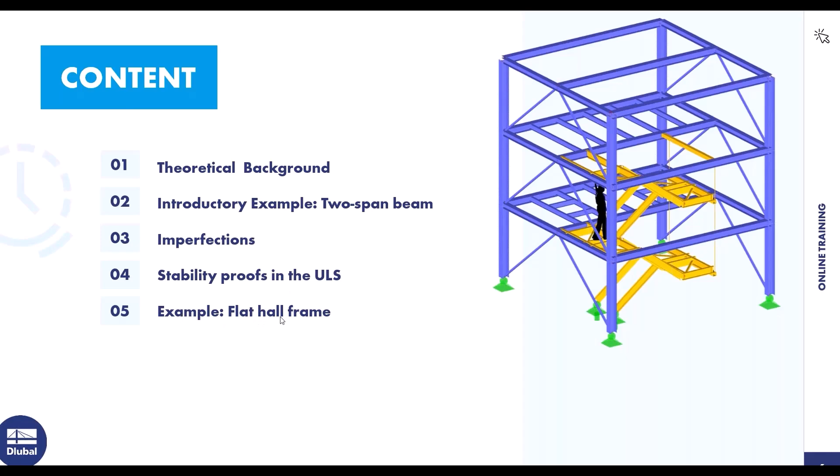At first, I'll say something about the products for design according to EC3. The most important add-on is the Steel Design add-on, and with that add-on you can design steel members according to international standards like Eurocode, AISC, and so on.

We calculate or design according to Eurocode today. Then there's the add-on Torsional Warping, with which you can consider the 7th degree of freedom and torsional warping. Then Steel Joints, with which you can analyze steel joints based on the finite element method.

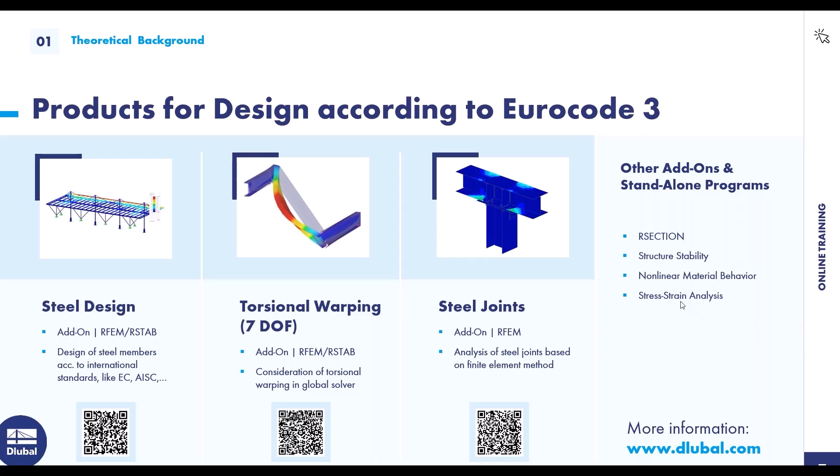Then there's the cross-section program RSECTION, and the add-on Structure Stability, which we use in the second example. Then there's the add-on Nonlinear Material Behavior, where you can, for example, consider a plastic design of steel plates or so on. And then there's the add-on Stress Strain Analysis.

Then a little insight into the whole safety concept in steel construction. The actions should always be smaller than the resistance. Those are the actions, this is the resistance, and in addition we have certain coefficients that we have to take into account depending on what type of proof is used. You can see the different coefficients here.

Those are the coefficients for the German national annex, and you can see there is for the stability analysis another safety coefficient. But if you select the German national annex, for example, or another national annex, this coefficient is considered automatically by the program. It's automatically higher.

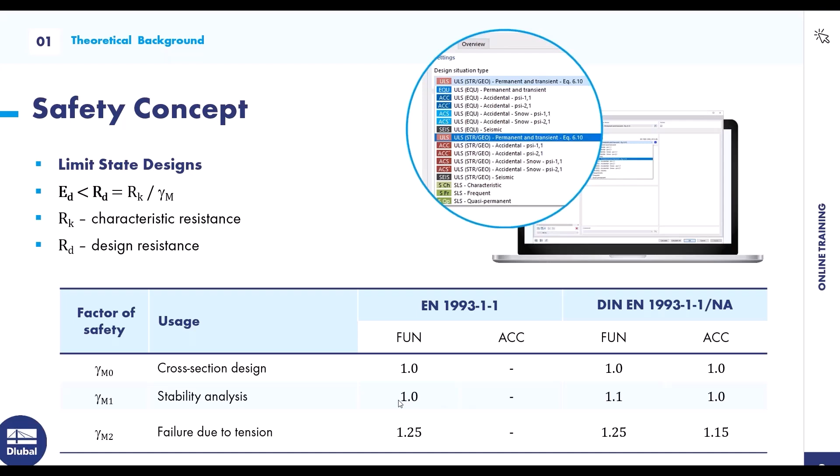So, okay, then the next slide: elastic or plastic global analysis. Whether an elastic or plastic calculation is possible always depends on the cross-section classes. There are 4 cross-section classes. In the first cross-section class, there's a high rotational capacity, and this allows a plastic structure calculation.

Now, for example, you can consider plastic hinges, but it's not often used in practice, and the cross-section resistance can be applied plastically. Cross-section class 2, where there's a low rotation capacity, allows an elastic structure calculation, and as with cross-section class 1, the cross-sectional resistance can also be applied plastically.

The first and second cross-section classes are where you can consider a plastic cross-section resistance. Then cross-section class 3 and 4 allow only an elastic structure analysis, and the cross-sectional resistance can only be applied elastically. For cross-section class 4, only a reduced cross-section resistance, the effective cross-section, applies.

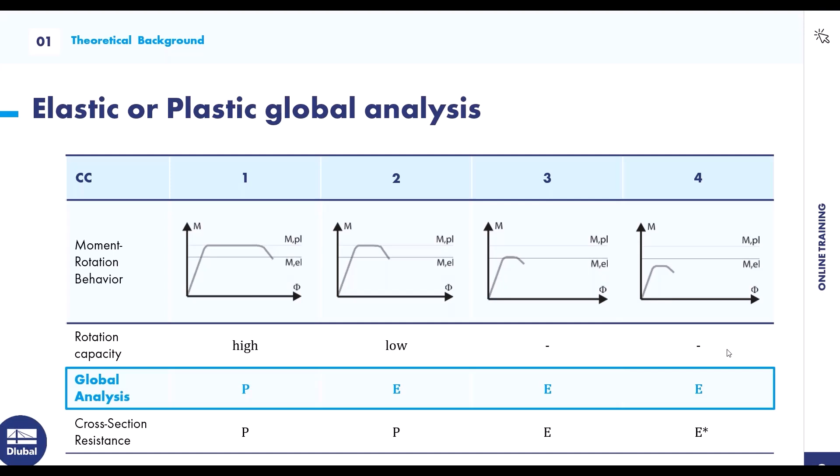That's the first example, the two-span beam, with a field length of 12 meters left and 12 meters right. A beam IPE 550, steel S235, a self-weight load case, and a load case with an imposed load.

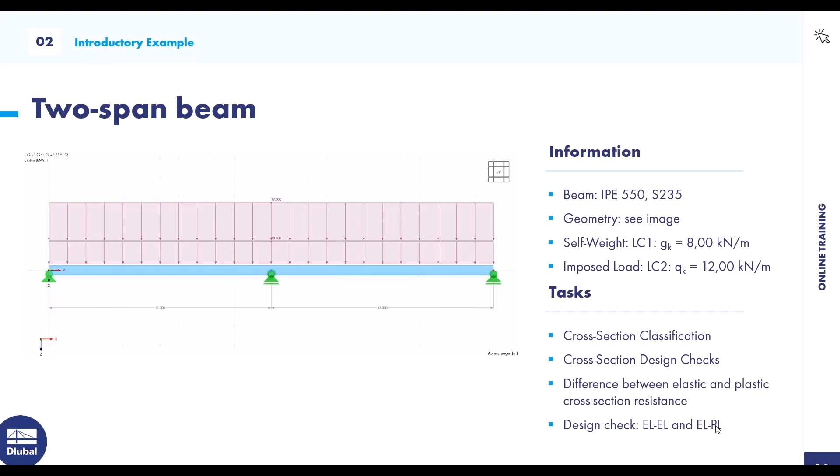And we will calculate or do a cross-section classification and cross-section design checks, the difference between the elastic and plastic cross-section resistance. We take a look at the design checks, elastic and elastic-plastic. Okay, I turn to RFEM.

That's the second example, it's already prepared. But for the first example, I'll model the complete structure. File, new.

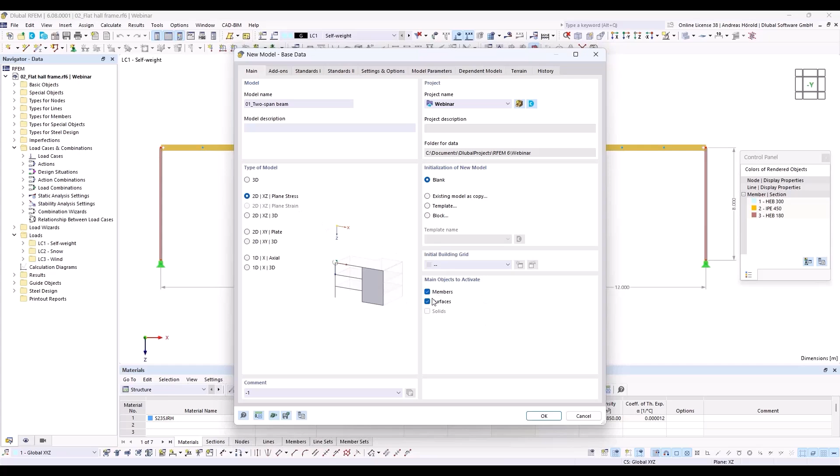So I enter 01_Two-span beam. Then type of model 2D is sufficient. We consider only members, but you can also select surfaces, that doesn't matter. And we select the steel design add-on.

Then we need to select the standards. You can see there are, for the load cases classification and the steel design, different international standards. We select the Eurocode, and for today we are in Germany here, we select the German National Annex.

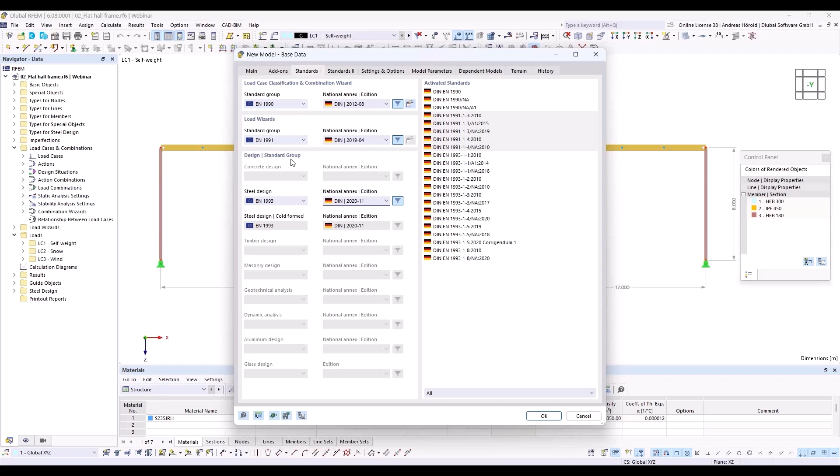We don't use the load wizards, but we use the load case classification and the steel design. We leave the dialog with OK.

So I turn to the view -y, move it a little bit. So the grid is 1 meter. I leave that. If you want to change that, you can click on this here at the bottom, display grid, right click and then edit. And you can change the space for the grid points.

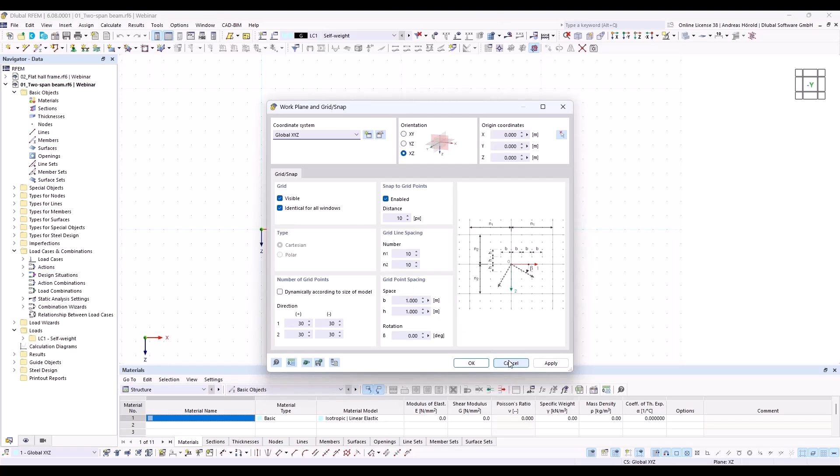So I start with the beam, here left above, new single member. I need to define a section, create new section. I turn to the library.

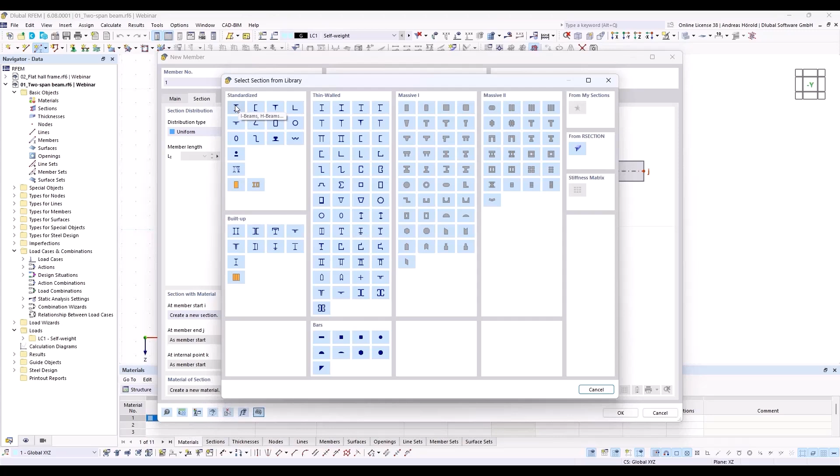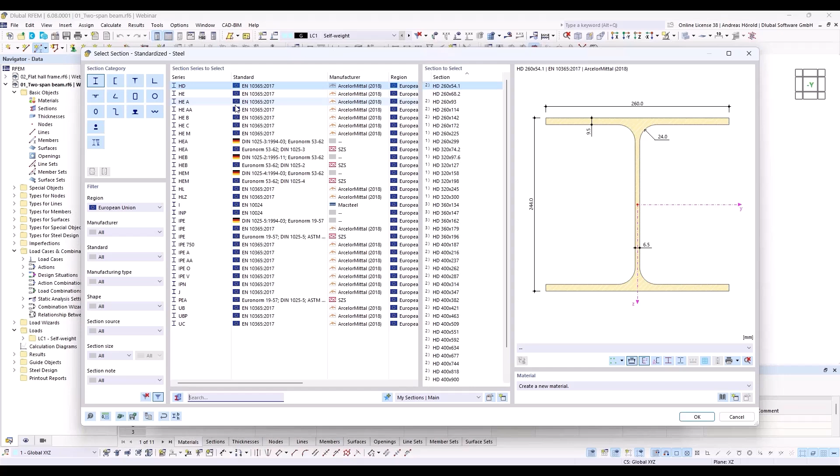Left above, an I-beam. If I'm too quick for you, that doesn't matter. There is a recording. When you want to enter the structure by yourself, you can use the recording and the finished models. The next days you will get an email with the recording and the models and so on, the PowerPoint slides. Just take a look what I show.

That's sufficient. Okay, I select IPE 550, and right at the bottom I open the material library and I select European Union, steel, carbon steel. There are a lot of steel materials. I use the steel material S235.

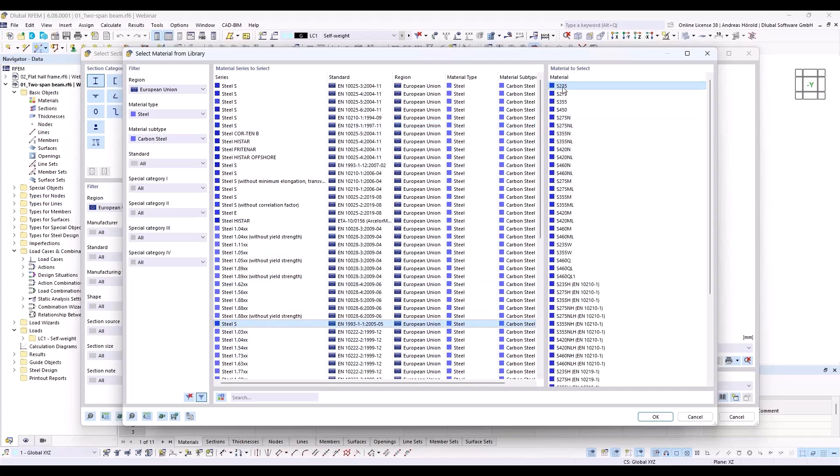Okay, you can see now the color is blue. That's okay.

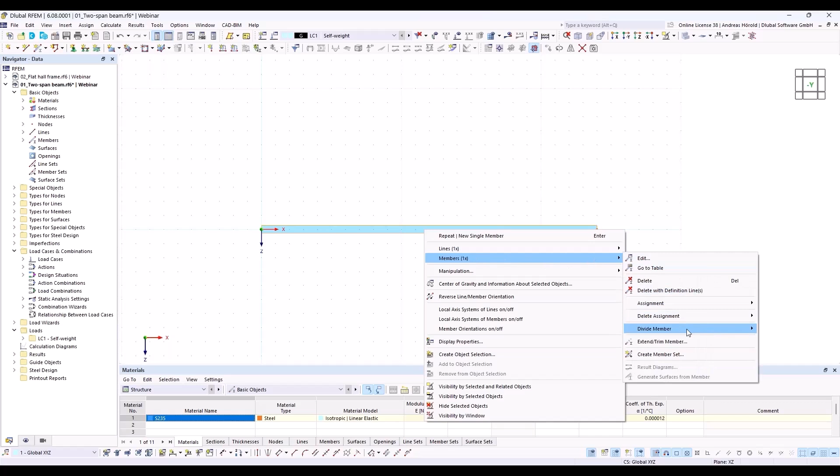So I create a member with a length of 24 meters and I divide the member in the middle with right click, members, and divide member and intermediate nodes. One intermediate node, and that I create a node without dividing the member. I select this option here, create on member nodes without dividing member.

Okay, there's the node. So then I create the supports. Here left above, assign nodal support.

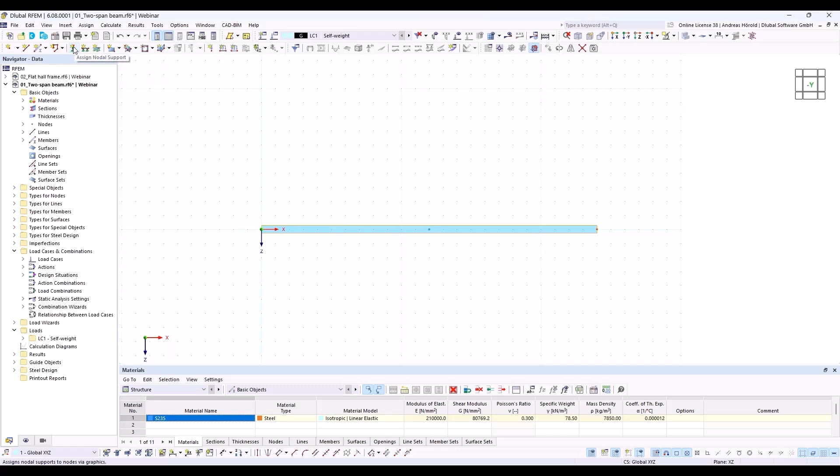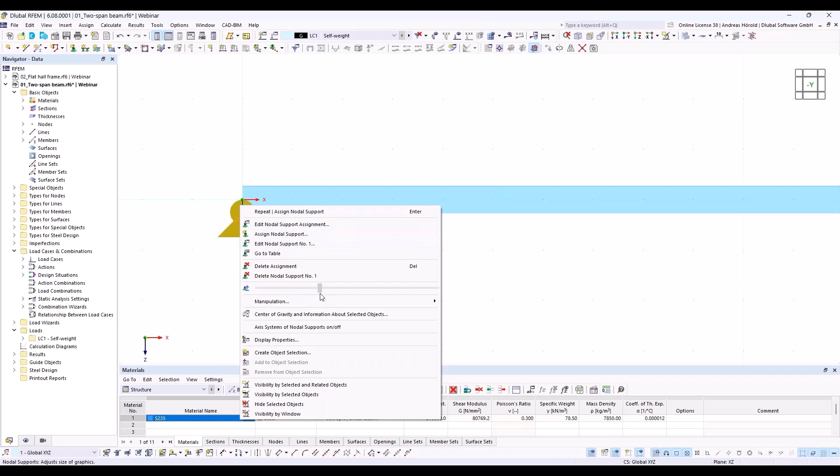So I press the edit button to take a look if all is okay. Yes, we support in an X direction and in Z direction. Okay, and this node is quite a little bit small. With a right click, I can increase the size of the support. Okay, that's enough.

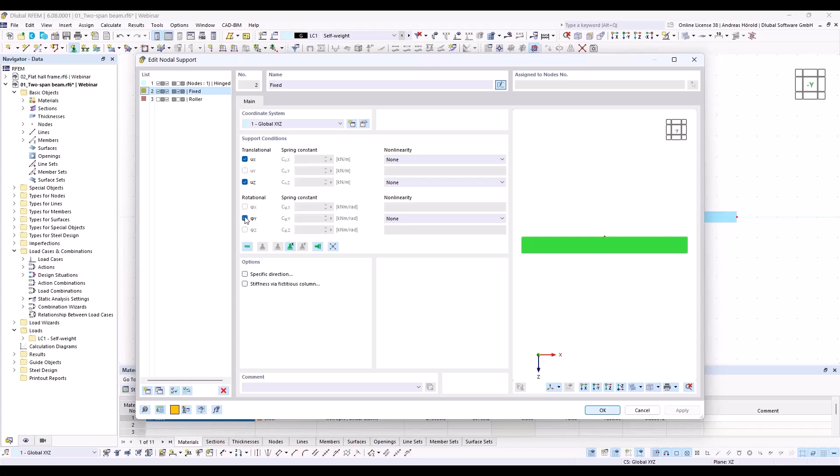So next support, I select the second support and press the edit button. Yeah, we don't want to fix the rotation for the support, and we deselect the fixing in X direction. We only want to support the member in Z direction.

So that's all for the model. I create the loads. There's a self-weight load case. I select here edit active load case. The self-weight load case is automatically created for every model. So, and you can see also the self-weight of the structure is activated. Yeah, that's correct in our case.

So, and above, this button, new member load. And our load should be a force, uniform. You can see there are different options. And the load direction should be in Z direction, in this direction. So and the load magnitude should be 8 kilonewton per meter.

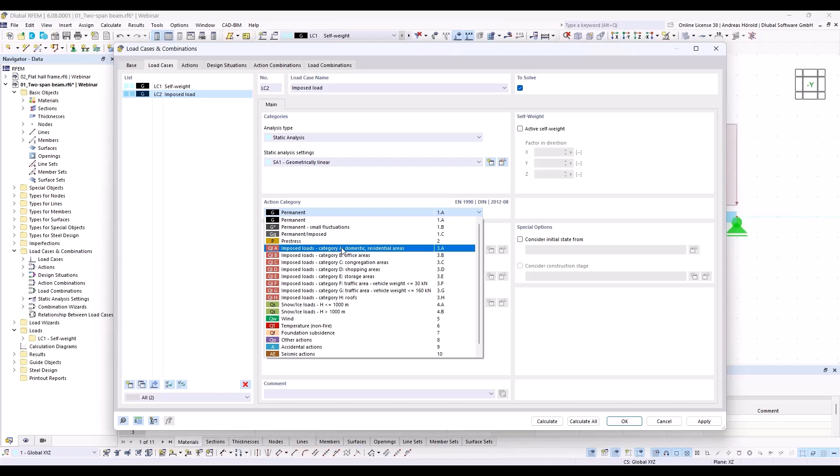Okay. So then I create a new load case with that button. I call it imposed load. And I select the action category, not permanent, but imposed loads.

Okay. Then I have to create the load for this load case, new member load, and this time 12 kilonewton per meter. Okay. That's all for the model and for the loads.

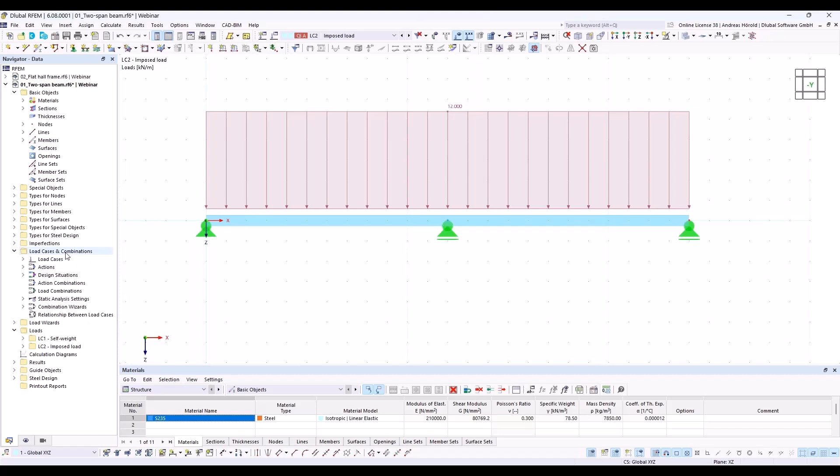I open the load cases and combinations dialog again, this time over the navigator data with a right click. Load cases and combinations. Where are the base data? Now, at the beginning, we selected the standard group Eurocode and the German national annex, and we activated the combination wizard. Those are my two load cases.

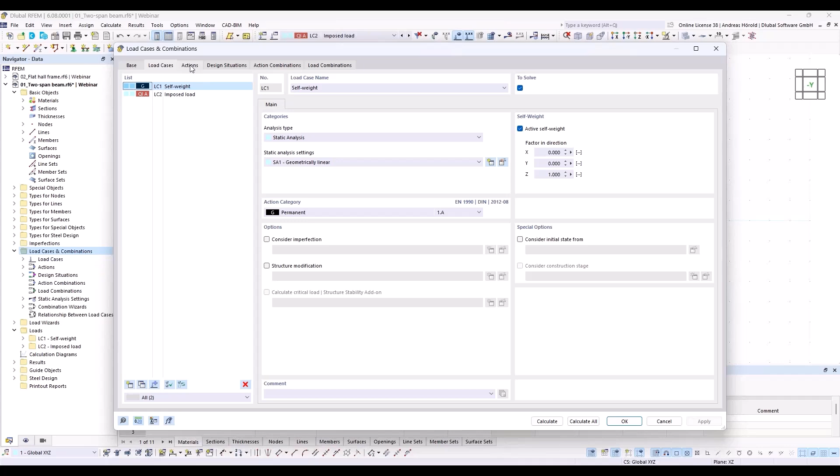We've got only two actions. Yeah, that's quite important when you have, for example, 4 wind load cases. Then there's only one action for the wind load cases. And yeah, you can combine in the load combinations either wind in -x or wind in +x and so on.

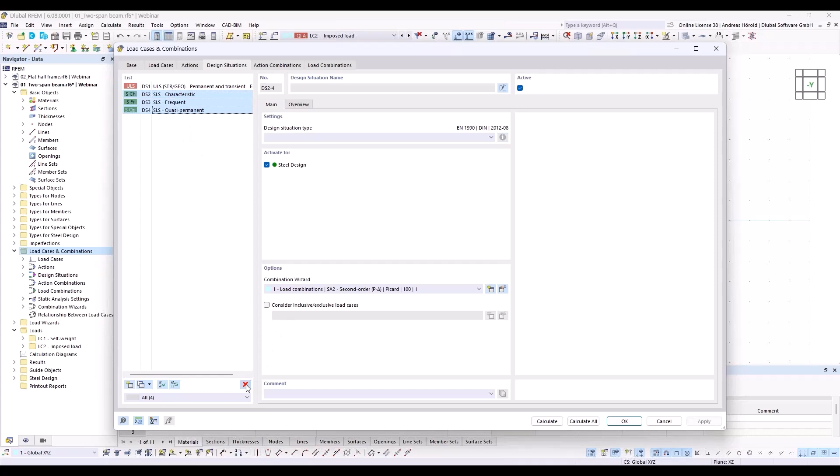So then there are the design situations. We would like to design only according to ultimate limit state. That's why I delete the design situations for the serviceability limit state. And what's important, we need to activate the steel design.

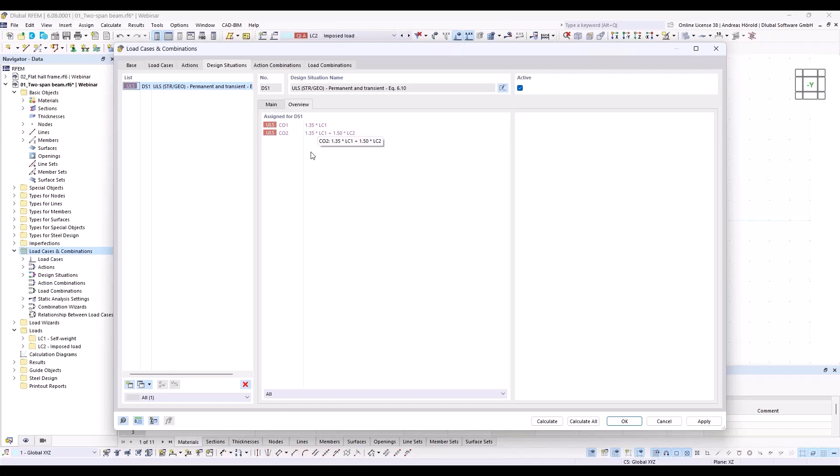So, and there are only 2 load combinations. And if I turn back to the design situations and to the overview, where are assigned these 2 load combinations for the design situation, ultimate limit state design. So then we can calculate also the steel design.

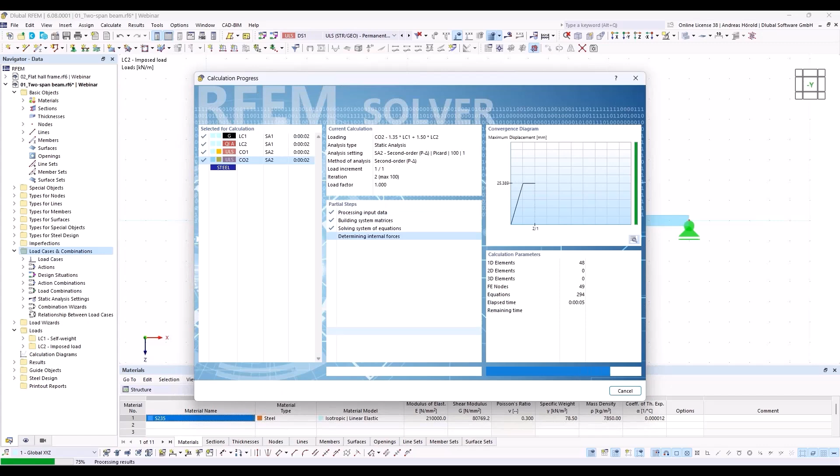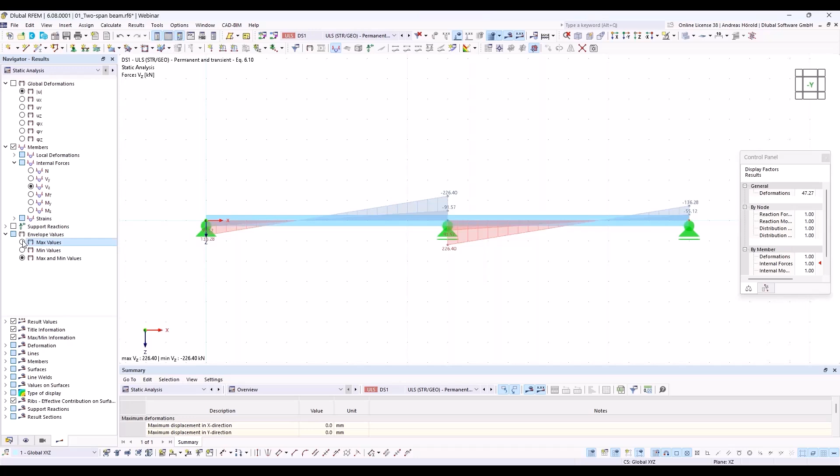At first, we take a look at the internal forces and the navigator results on the left side. The VZ, for example, I can also select only the maximum values, not minimum and maximum. So VZ and MY.

So then we can go to the table at the bottom and to the steel design. An error is displayed after the calculation. This is because we haven't made any steel design settings yet. We are only interested in the cross-section verification here.

Therefore, we change to the table design ratios and members. So there's the section proof for shear and for bending, and you can see a plastic design was done for the program. So if I select the line and press this button, design check details, this dialog is opened.

Students' request for a detailed presentation of the proofs is now possible. You can see the equations and where you can find it in the standard.

Okay, then cross-section classification. You can see where the cross-section is classified in class 1. That's why a plastic design is possible.

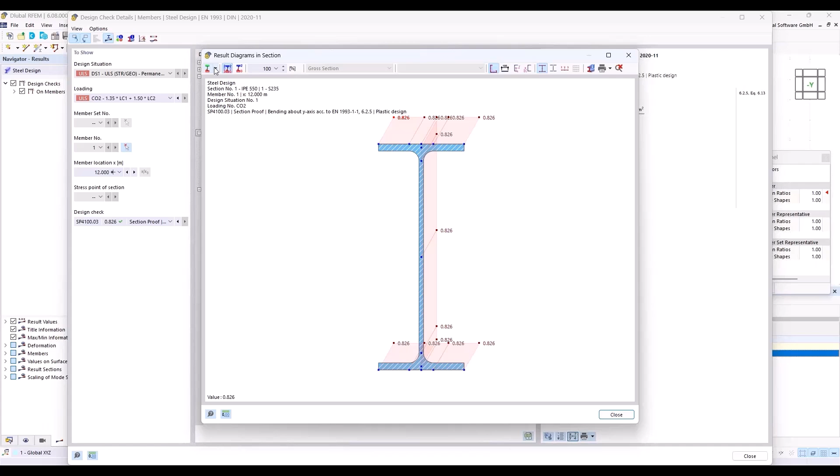So we can also take a look at the result diagram, the design ratio, the stresses. That's the stress in the middle, or over the middle support, and there's tension at the top and compression at the bottom of the cross section.

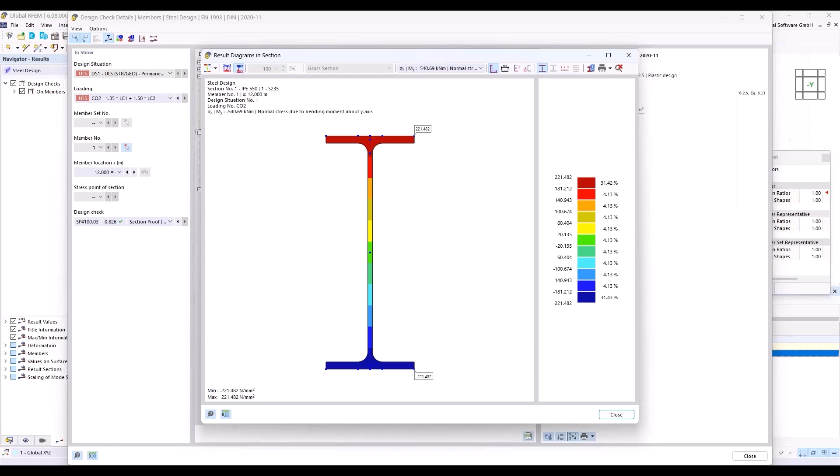So yeah, okay, that's all. Can I show also maybe the cross section information, the stress points, the different sub panels for the cross section classification, the C to T parts.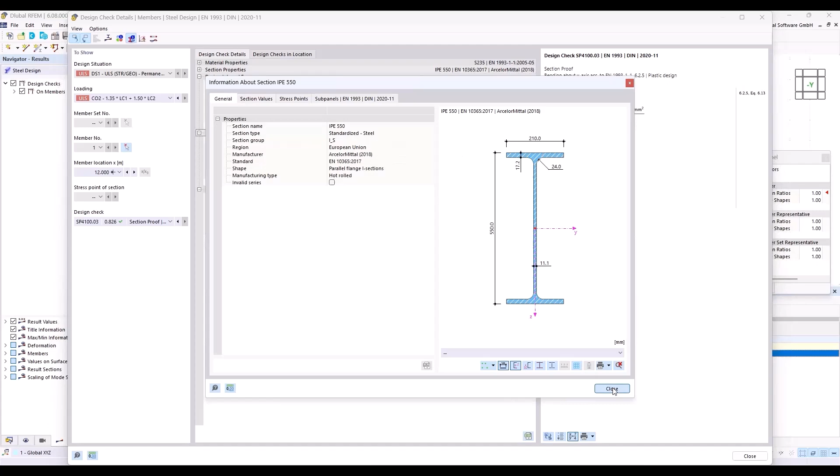Okay, that's all. Yeah, and the same, you can also, if you want to check the proof for the shear, you can either press that button or double click on the line, and you can see the equations from the standard.

Okay, now we don't want to do a plastic, but an elastic design. How to do that? I turn left at the bottom to the navigator data. Then I open the steel design folder and the ultimate configurations, and I double click on it.

Yeah, and then I can, for example, uncheck the stability design. Then this error message doesn't appear, but it doesn't matter. I select that button here: elastic design also for class 1 and class 2 sections.

It's allowed to do a plastic design for class 1 and 2, but in this case we would like to do an elastic design also for the cross-section class 1. In our case, the cross-section is cross-section class 1.

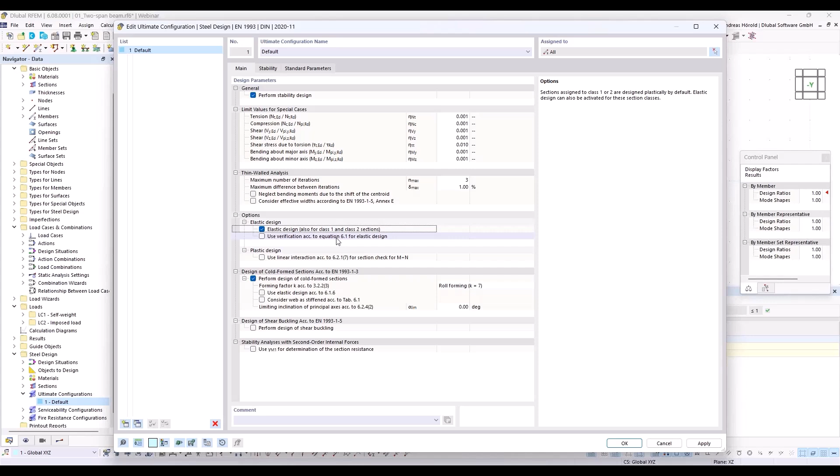Okay, we calculate or rerun the steel design again, and I select design ratios and members. I remember we had a design ratio for the plastic design of 83%, and now we've got 94%, because we do an elastic design. And if I double click on it, I can see the equation.

Okay, what you can hold in your mind is that we can do every time an elastic design. We can consider the elastic cross-section resistance. That's what we did in the second step, in that step here.

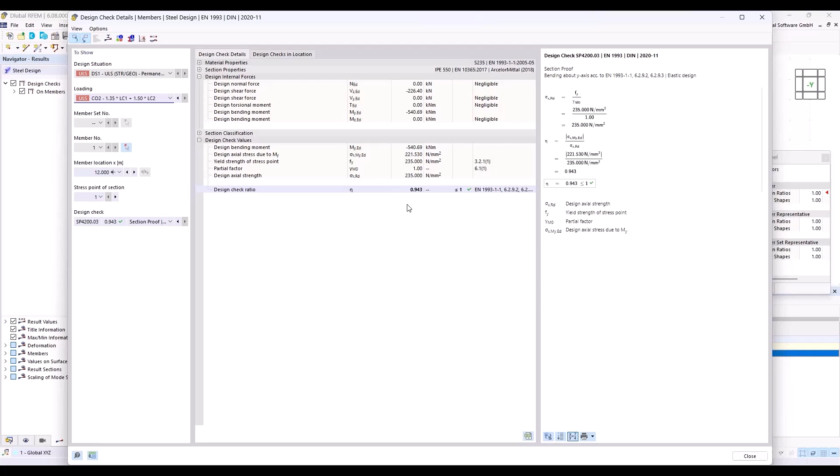So we have now learned how to carry out a cross-section check and how to take the elastic and plastic design into account. At first the plastic design, in the second step the elastic design, because elastic design is allowed for all cross sections. And in addition, we now know how to display the design formulas and compare them with our own manual calculation.

Then we turn to the next topic for today: effects of deformed geometry of the structure. In the first training course, Introduction to Member Design, it was learned how the results can differ between the calculation according to the first order theory and the geometrical linear analysis and the second order theory. The geometrical linear analysis is an equilibrium formation on the undeformed system, and the second order analysis is an equilibrium formation on the deformed system.

In this example of the cantilever column, this effect can be seen very well on the basis of a slender and a compact cross-section. In the case of the slender column, the increase in the bending moment at the foot point is much larger than in the case of the compact column, if one calculates according to the second order theory. And there's no difference when you apply the geometrical linear analysis.

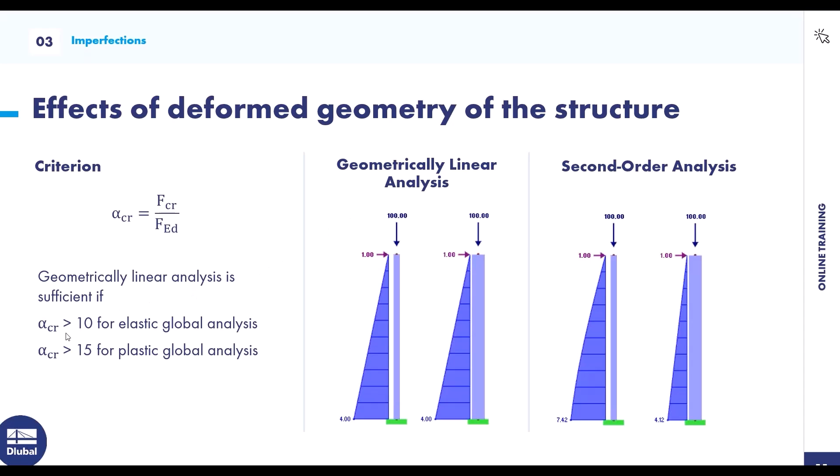Okay, so then the next point is the equivalent geometric imperfections. Imperfections are also closely related to this topic. Here we have the imperfections in Eurocode 3, and these are generally grouped together as equivalent geometric imperfections.

Maybe first of all, what are imperfections anyway? Imperfections are production-related deviations in the model geometry and/or in the material properties. On one hand, there can be real misalignments in classic hall constructions or tolerances in production, especially when rolled sections are used. These imperfections can be summarized as equivalent geometric imperfections.

On the left side of the graphic, you can see the initial sway, the global imperfection that can be applied to the structure. And if individual components are to be examined more closely, there is the local equivalent imperfection, for example the initial bow imperfection.

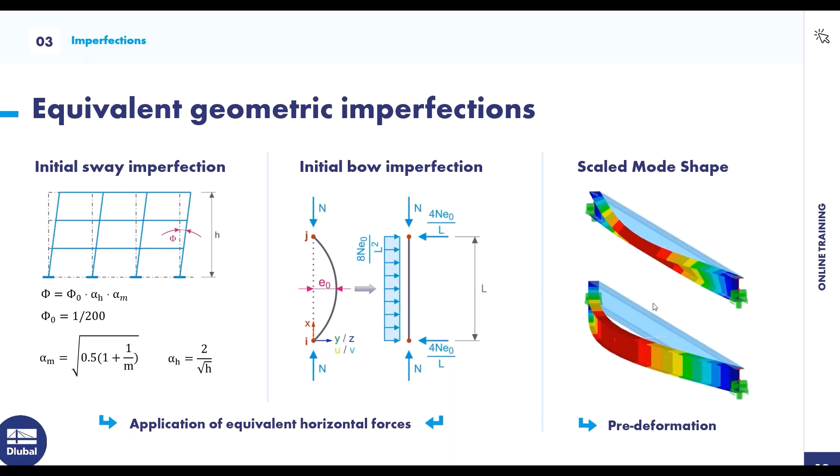What you often use is the initial sway imperfection or the initial bow imperfection, or both. You can see that in a later slide.

When designing steel in RFEM, 3 different stability analyses are carried out. On the left side, there's the classic flexural buckling as a lateral deflection. In the middle, you can see the torsional buckling in pure compression. And on the right side, the lateral torsional buckling as a combination of the two previous proofs.

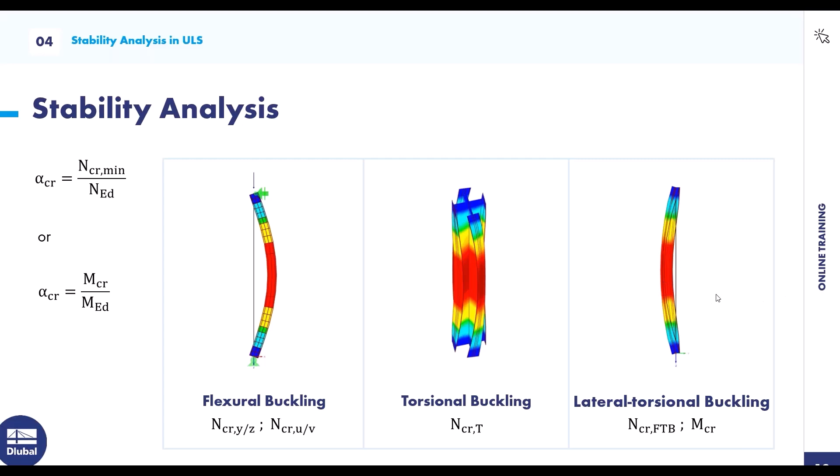Okay, methods for stability analysis. There are 3 methods. Method A: you have to apply a global and local imperfection, and the structure analysis should be done with the second order analysis. Then you can do the cross-section design checks with the internal forces.

Method B: global imperfection, meaning only this initial sway imperfection. So then the structure analysis according to second order analysis. What's quite important, you have to consider the buckling length as the member length, not with a factor. SK is equal to length.

Okay, then method C: structure analysis according to geometrical linear analysis on the ideal structure, but in that case with the real buckling length.

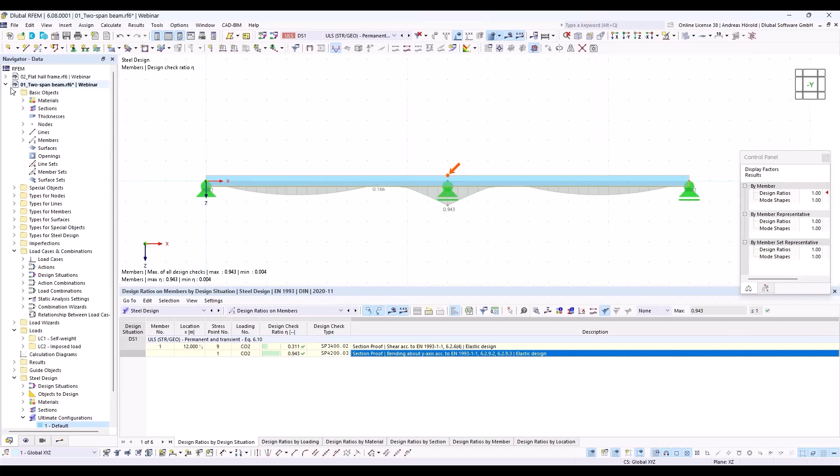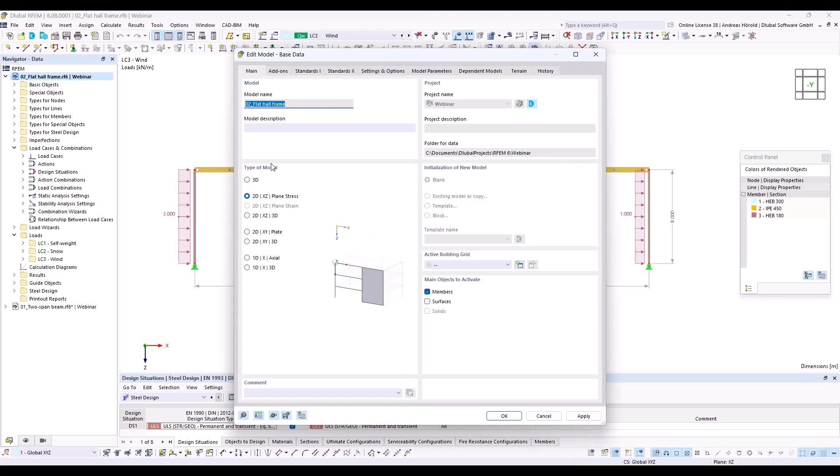Left above, I go to or turn to the base data, a 2D model, and we use the add-ons structure stability, and the steel design add-on. And we select the standards, Eurocode, and the German National Annex.

Okay, so yeah, and we use the add-on structure stability to check whether we are allowed to determine the internal forces according to the geometrical linear or second order analysis.

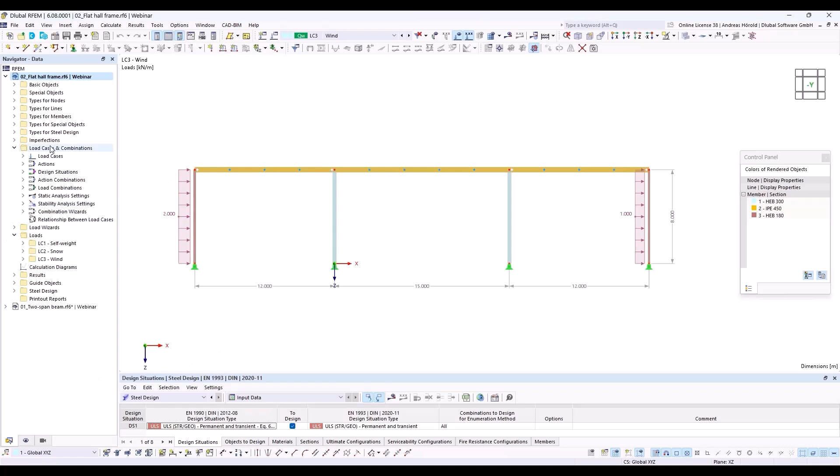That's why we turn to the load cases and combinations, and I go directly to the design situations. I select the geometrical linear analysis, and I edit that, and I activate the stability analysis. Okay, and I run the calculation.

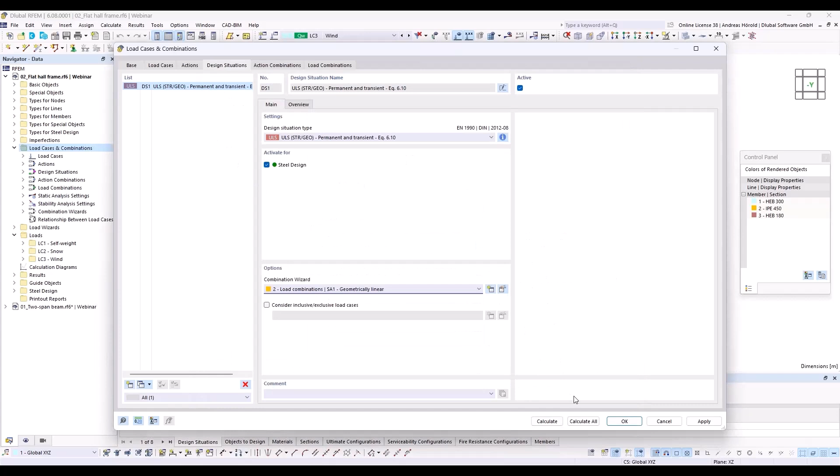So, and after the calculation, we see the minimum critical load factor, 6.05 for the design situation, and 6 is smaller than 10. Yeah, we need to do a stability design by using the second order analysis.

Yeah, but what I already mentioned, for the stability design using the classic equivalent bar method, means method C, the internal forces can be calculated according to geometrical linear analysis, and yeah, buckling lengths must be assigned to the columns. But for the design of the lateral torsional buckling, the application of the second order analysis is also required with this method.

That's why I switched to the second order analysis. For the columns, yeah, we consider then the effect twice: one time with the second order analysis and with the real buckling length. But we need to apply the second order analysis because of the horizontal beam and the lateral torsional buckling.

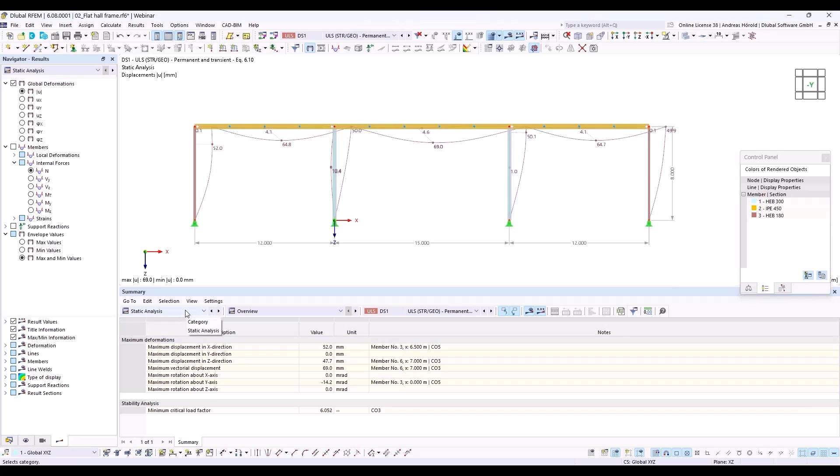So, but let's take a look first at the buckling length. I turn to the stability analysis, then results by member. It was combination number 3. So, and then I can see the effective lengths and critical loads by member.

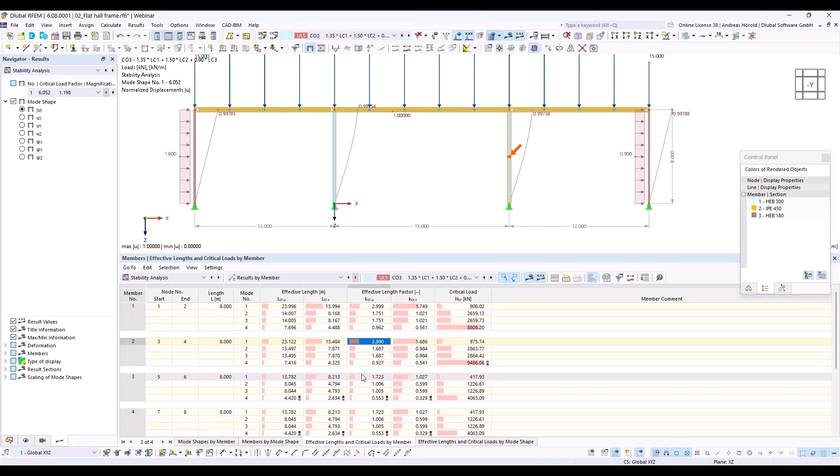So this column has an effective length factor of 3. This column, we apply also 3 for this column. And for the left and the right column, 1.72.

So I turn back to the design situation and we run, or we use the second order analysis. Okay, that's okay.

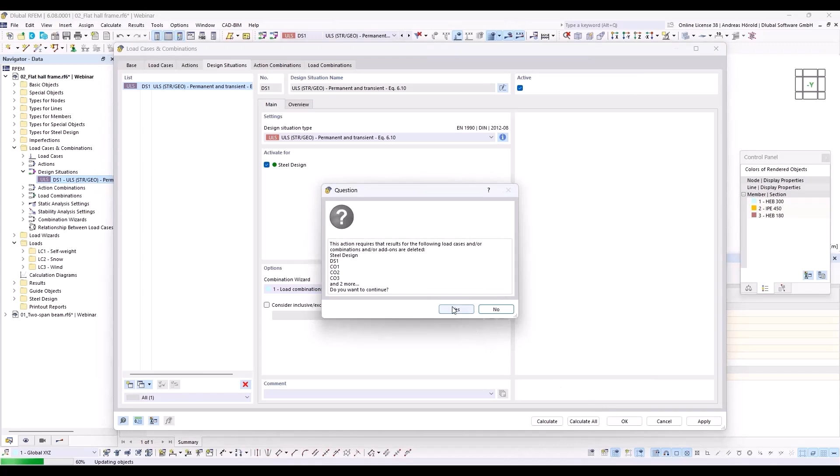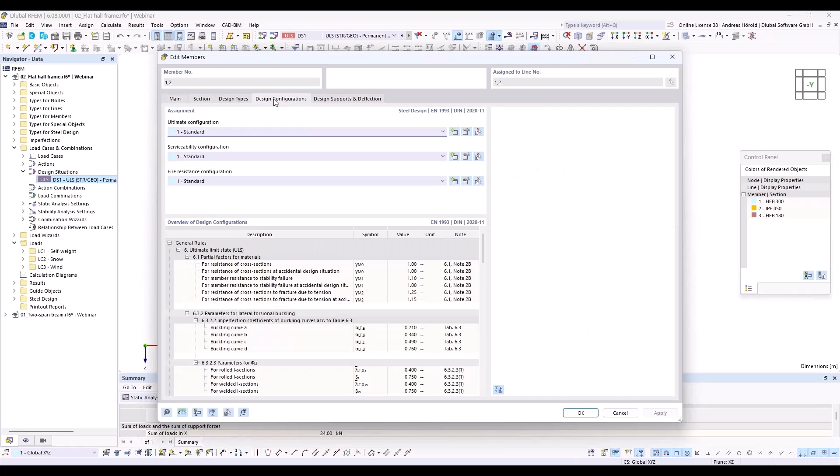So, and now we apply, we define the effective lengths, or we assign them to the columns. I select the inner columns, then I do a right click, members, edit, and I turn to the design configurations and design types, and I define effective lengths.

So I would like to mention that you can also import the buckling length from the stability analysis. Now we don't do that in this example. So then nodal supports and effective length. I define the effective length of 3 meters, of the effective length factor of 3.

Okay. Then I select the left and the right column. I press the control key. You can see the plus sign. I would like to consider or select both columns. Then right click, members,

edit. The same procedure, design types, effective lengths, and 1.72.

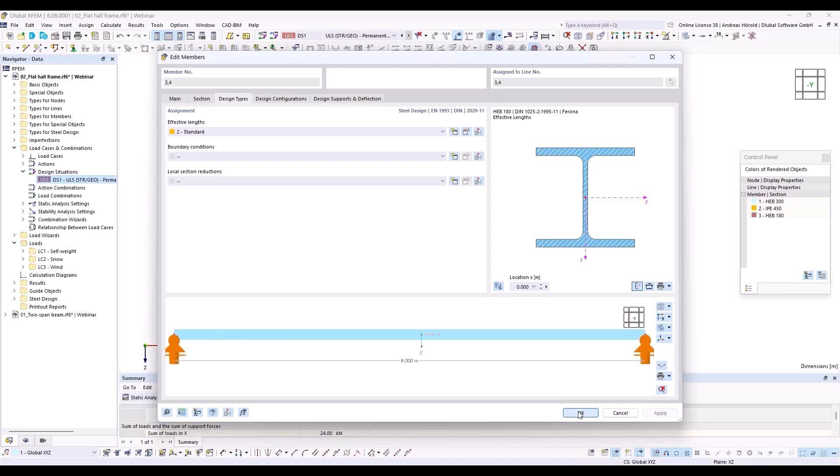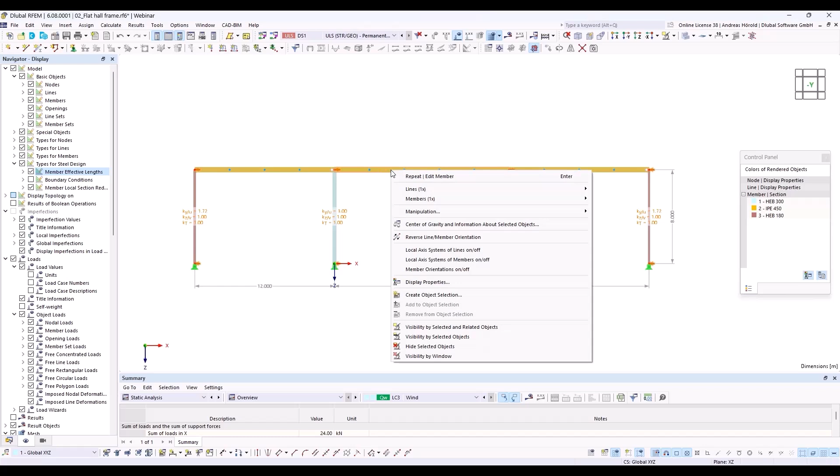So then I select the inner horizontal beam by right click, members, edit, then design types, effective lengths. I create a new effective length. So this time we would like to consider the horizontal supports, for example, by purlins.

That's why I press this button here, select member or member set. I select this member, and the program will detect all these nodes here. Okay, you can see that here. And we would like to fix it in horizontal direction. And I would like to consider that the upper flange is supported. The purlins lay over the horizontal beam.

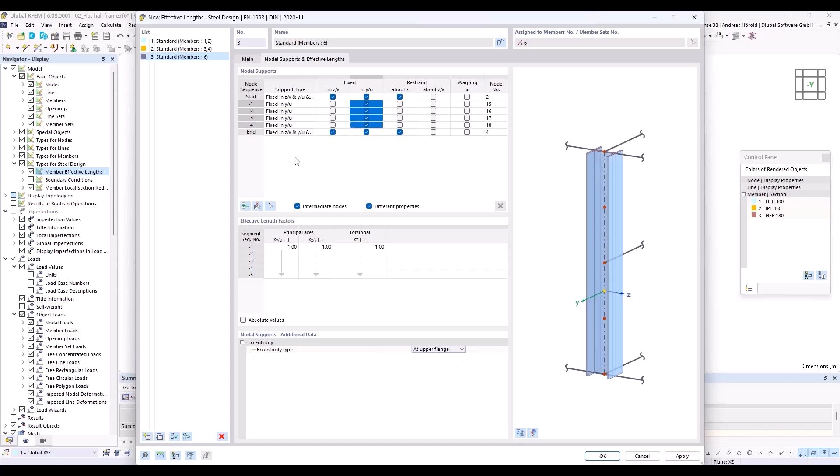That's why I select all these lines here, and I define eccentricity type at upper flange. Okay, I can leave the dialog and you can see the supports: fork support at the beginning and at the end. And for the inner nodes, there is only a horizontal support at the upper flange by the purlins.

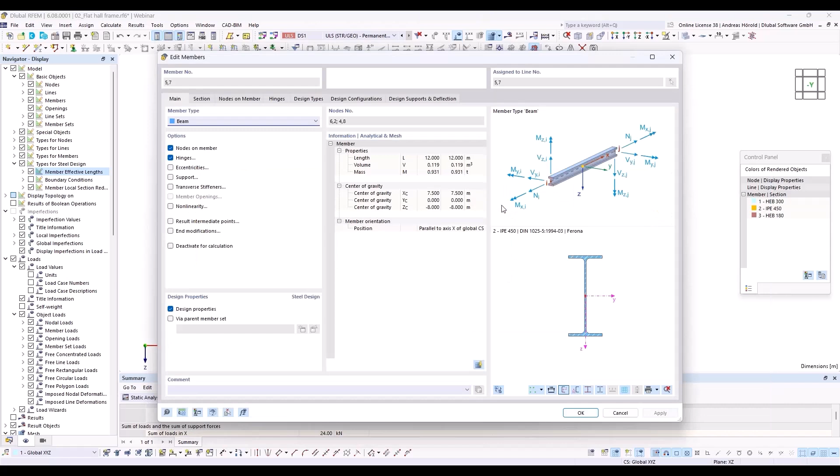So, okay, we need to do the same for the left horizontal beam and the right one. I select both with the Control key. Then members, edit. And I select the same effective length as for the middle horizontal beam, and you can see the program detects automatically that there are only 3 nodes supported and not 4 nodes.

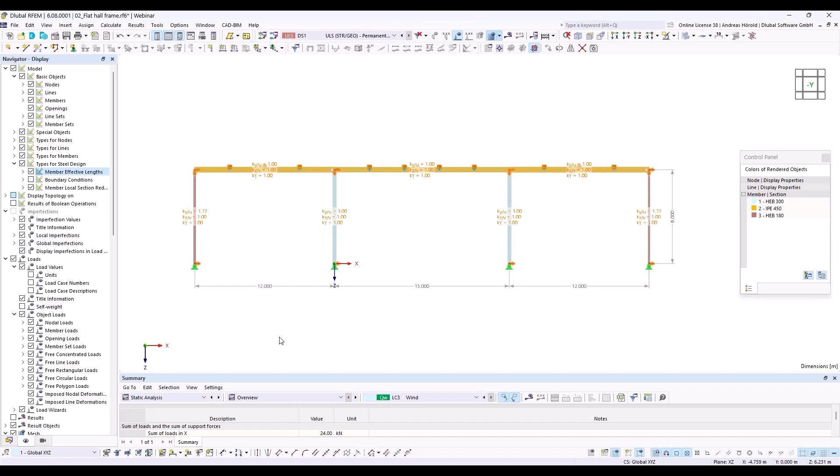Okay, then we can run the calculation. I turn to Steel Design and press this button, Show Results, and the calculation starts. So the calculation is done.

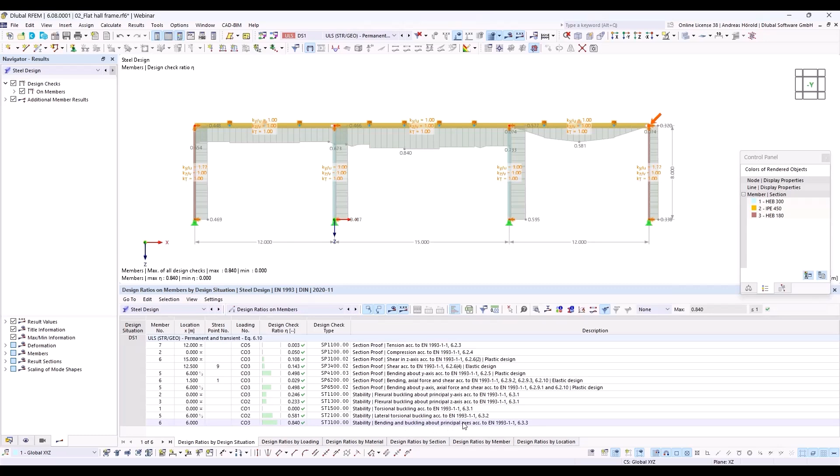We have a maximum design ratio of 84%, stability, bending, and buckling about principal axis. So I can double click on it and you can see the design checks, the equations, and where you can find it in the standard.

Okay, this was the classic structural component design, method C without imperfections, but with effective member lengths. Now we want to examine the model using the approach of global imperfections and the structural component design method B. I turn back to the PowerPoint.

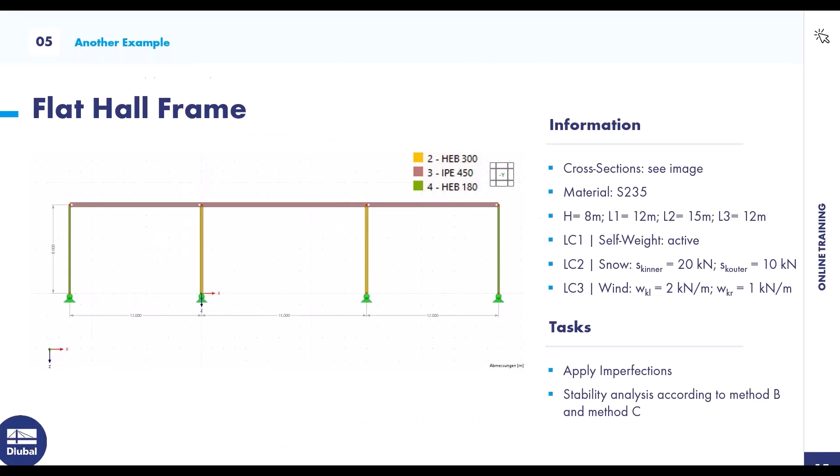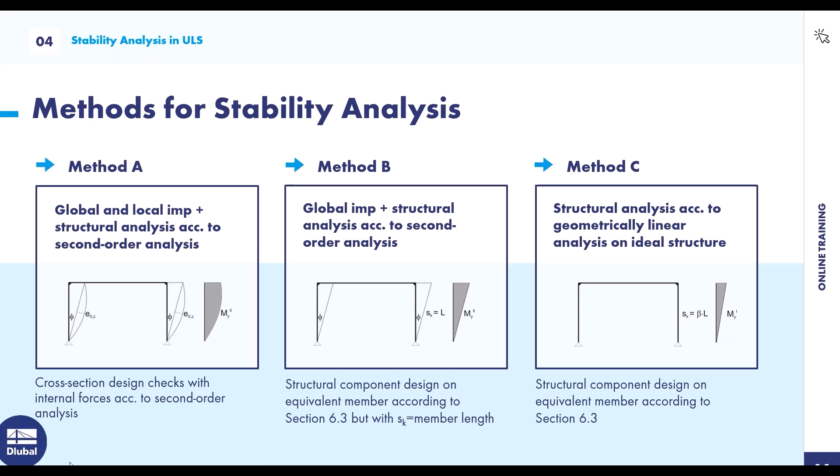We did method C, with the effective member lengths and without imperfections. And now we define imperfections, and I delete the effective member lengths for the columns. We consider SK equal member length. Okay, I turn back to the program.

Left at the bottom, I go to turn to the navigator data, then types for the steel design, effective length. Let me save that state, save as, without imperfections. Okay, I overwrite it.

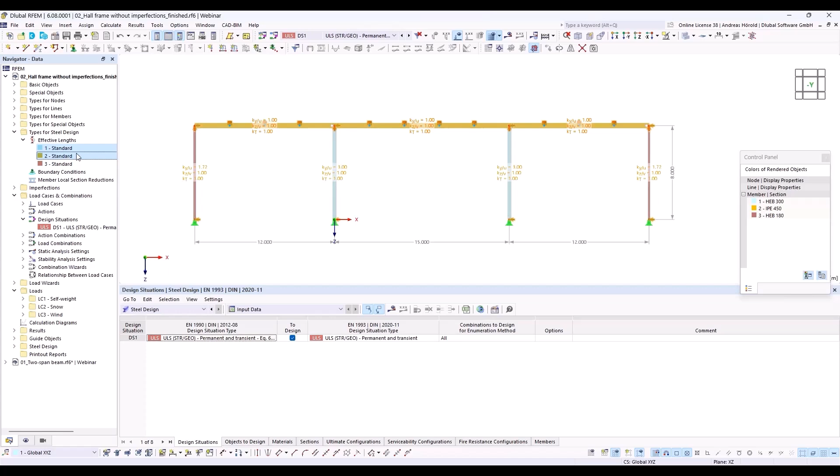And now I delete the effective member lengths, or the buckling lengths, for the columns. Delete. Okay.

In the second step, I need to define imperfections. So above here, that button, new member imperfection. I have to create an imperfection case in the first step, imp x. We have got imperfections and imperfection cases. You can consider more imperfections in one case. That's why we have imperfection cases and imperfections. That's the case, okay?

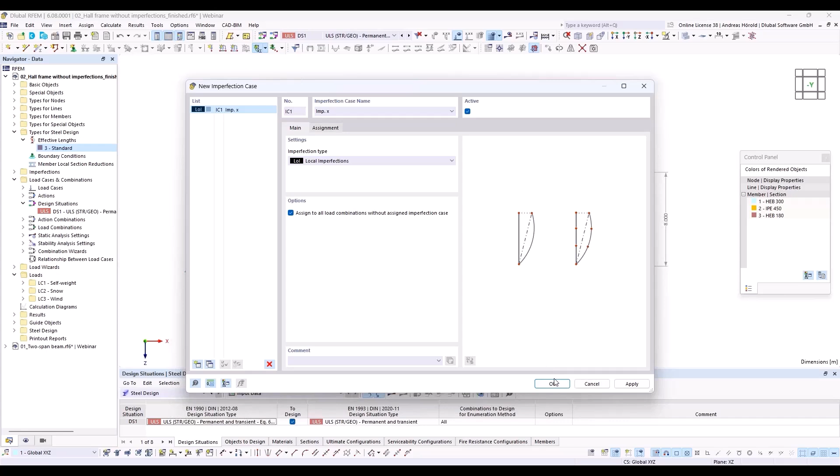And now we create the imperfection for that imperfection case. We define an initial sway. Define type is Eurocode 3. The imperfection direction is Z, in the strong axis. Then the basic value is 200. I can measure the structure height, 8 meters. Number of columns in one row, those are 4. And the reduction factors are calculated automatically.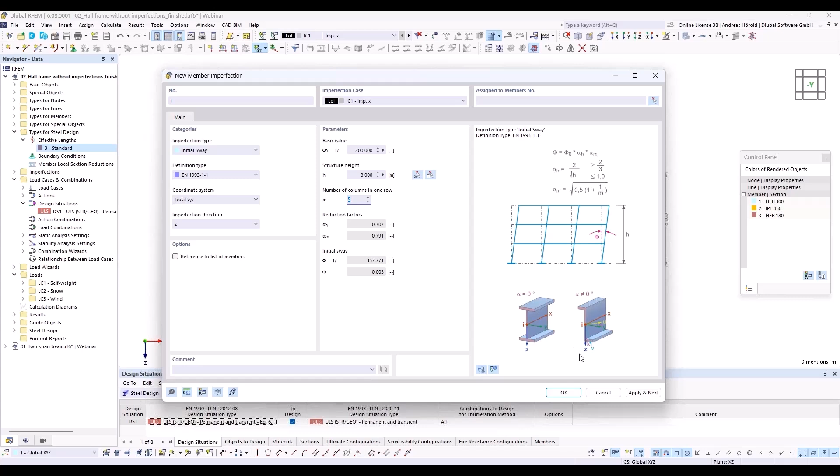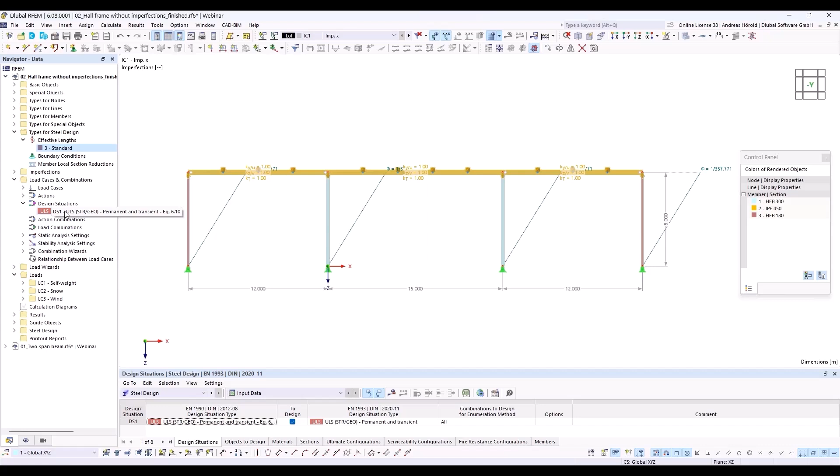Okay, and I need to assign it to all 4 columns. And to display it, I have to press this button above, Show Imperfections. So, and now we can run the calculation. Or before I do that, I take a look at the design situation, second order analysis. And it must be checked that the program considers the imperfection cases. Okay, now we can calculate all.

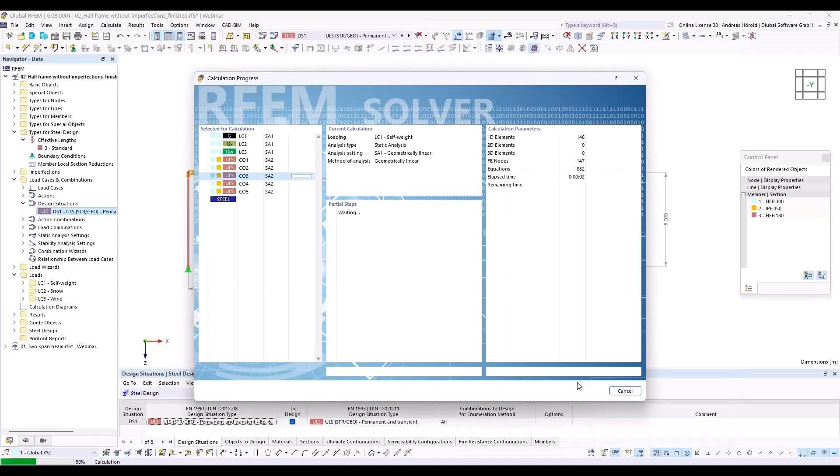So we go directly to the steel design, design ratios on members. And you can see the design ratios. With method C, we had a design ratio of 84%. Now we've got 86%. That's quite similar, different methods.

Okay, yeah, that should be all for today. You learned in the second example how you can apply method C in the first step, and then with imperfections with method B in the second step.